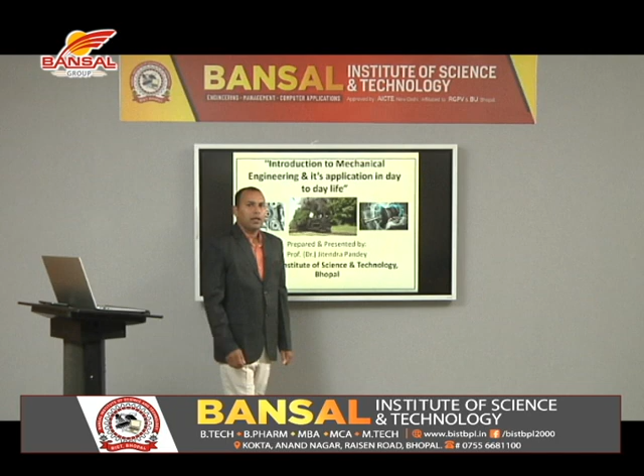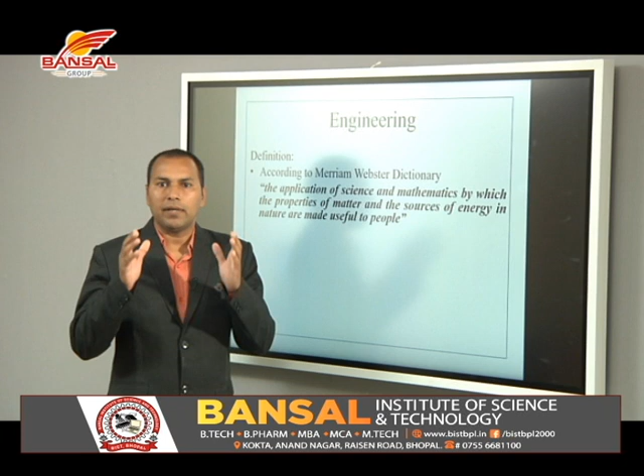Basically, engineering is the application of science and mathematics to design, develop and manufacture products for social utility for day to day use.

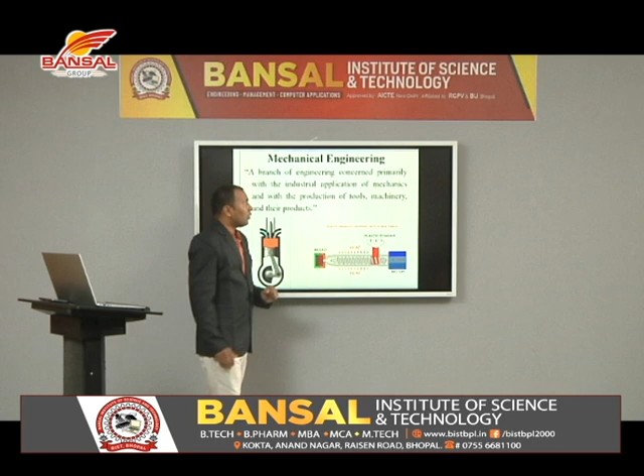Engineering is further divided into various branches like mechanical, civil, electrical, telecommunication and computer science engineering. Mechanical is one of the oldest branches of engineering. It deals with the analysis of force, mathematics and applied science to make and produce a product.

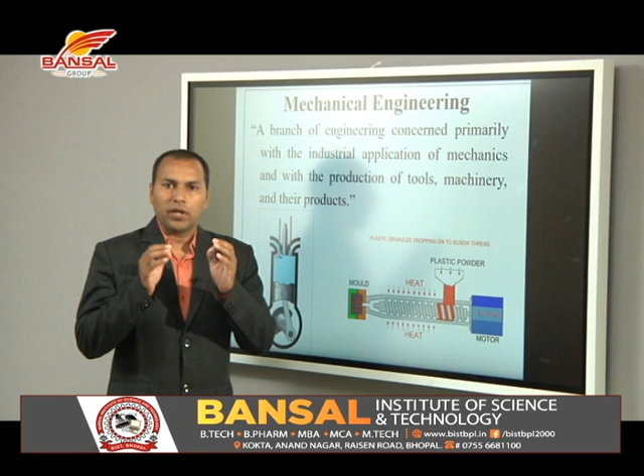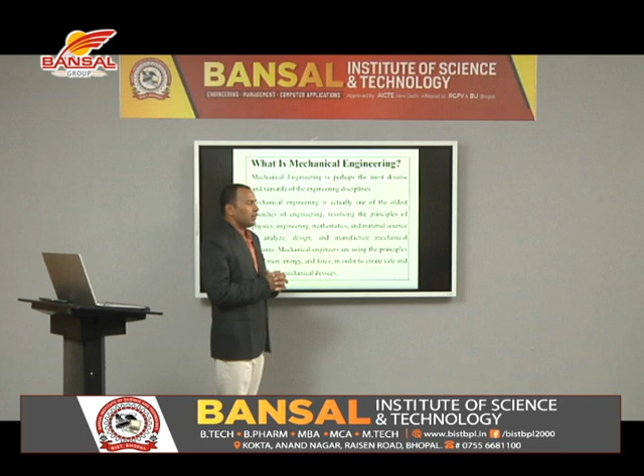Mechanical engineering is the mother of all branches. It governs day to day life and starts from early morning of life, from the cycle to the satellite.

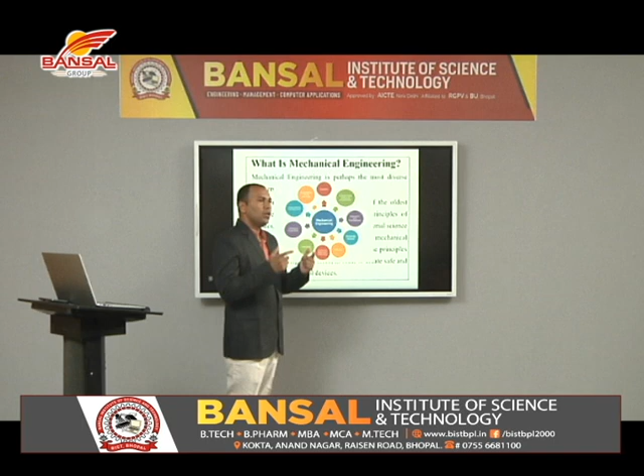Mechanical engineering consists of various subjects like physics, engineering chemistry, selection of material, strength of material, design of material, drawing of the product, and further its manufacturing, production and marketing, ending with recycling of the product.

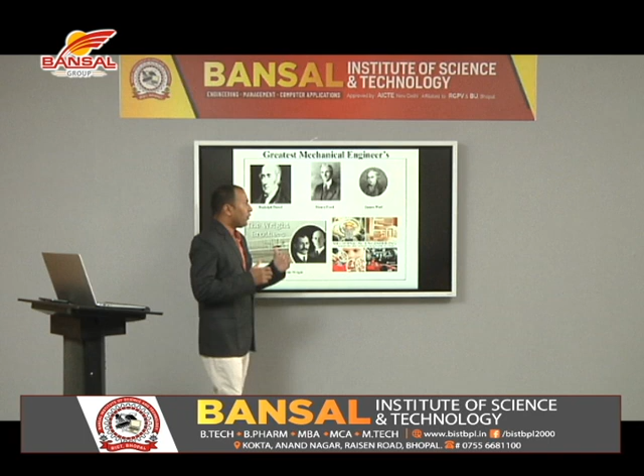These are a few of the great mechanical engineers in the world. We talk about James Watt, Carnot, Diesel, Henry Ford and many more. In our Indian continent, we see Dr. Visvesvaraya and Abdul Kalam.

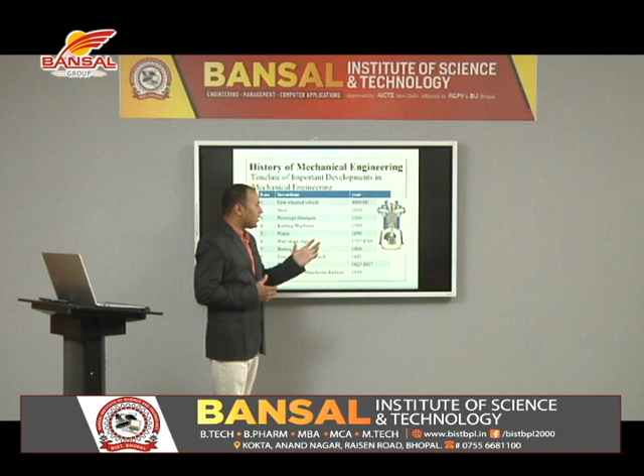There are mechanical products and machines discovered and invented for the utilization of society, like the wheel, steel products, knitting machine, and the cylinder-piston arrangement that is the foundation of the IC engine.

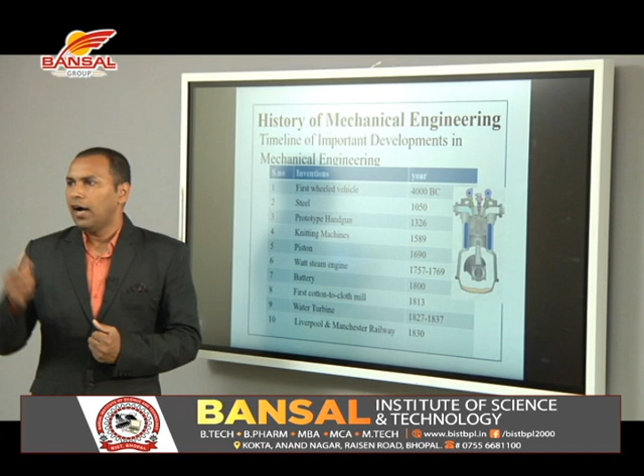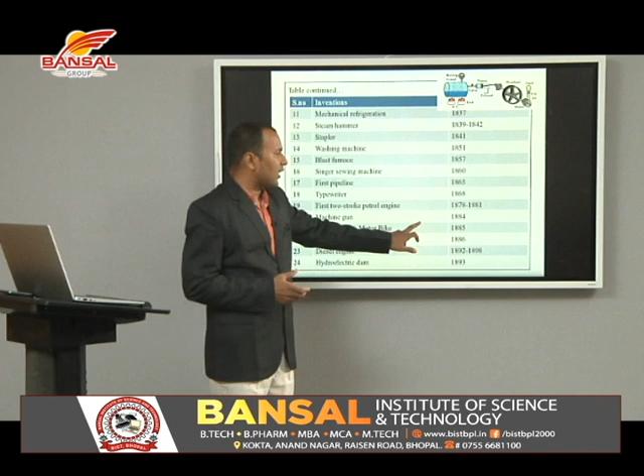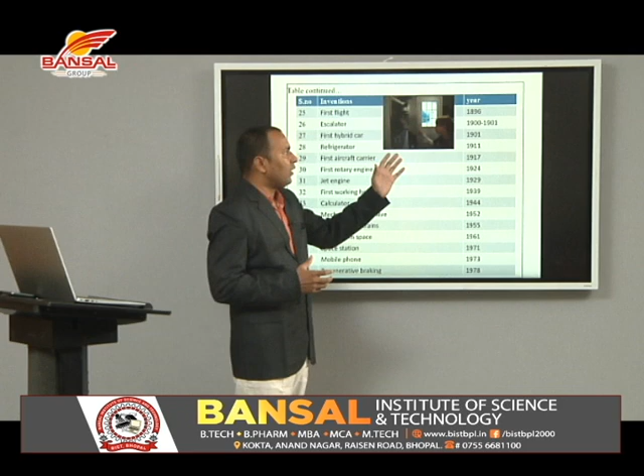There are machines like the steam engine, IC engine, and various vehicles we travel in day to day. You will have seen the refrigerator in your home - this was the first refrigerator, such kind of air conditioning machine that is a need of our society. These are a few live products of mechanical engineering, from cycle to satellite.

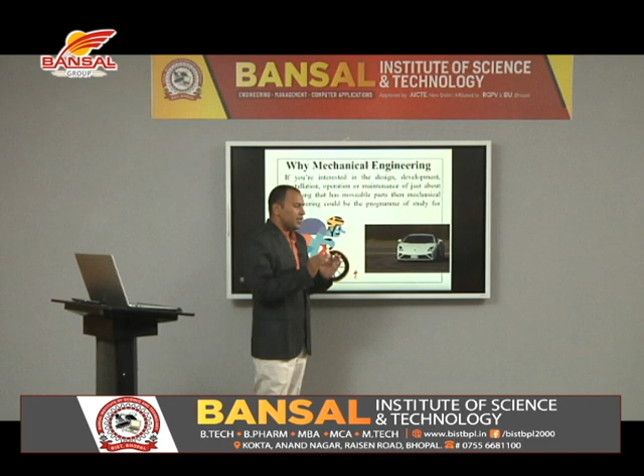Automobile engineering is one part of mechanical engineering. Mechanical engineering develops starting from the fulfillment of need, selection of material, design of the product, drawing of the product, and finally production of the machinery.

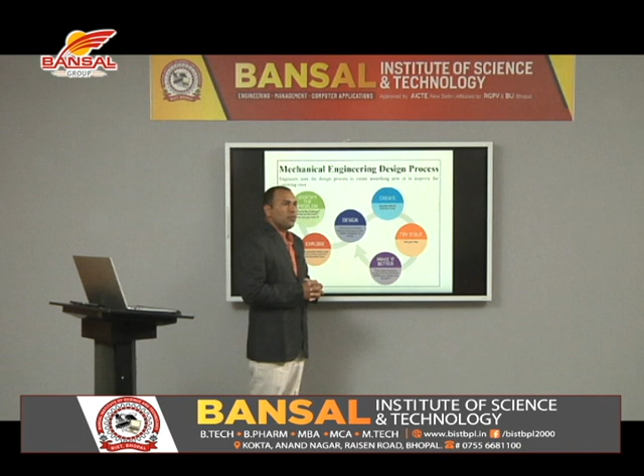In industry, whenever you go, you see how we find the need of society. After brainstorming, design, creation and trying it by hit and trial using various mechanical software, we develop the product first on computer and then do the manufacturing at real time.

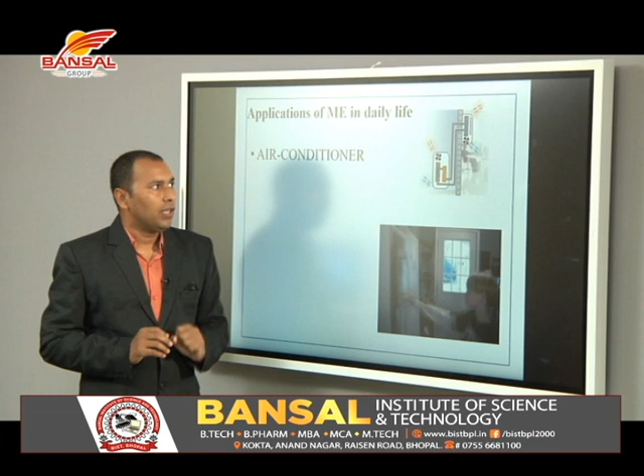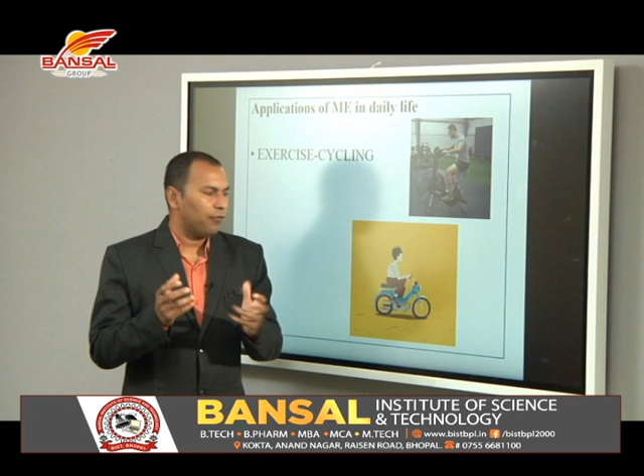When we see various kinds of mechanical products in day to day life, you will have seen the analog watch, hinges, air conditioning, refrigerator, and various kinds of cycles. That is the basic concept of mechanical engineering - how forces and mechanisms work together, how energy converts into work.

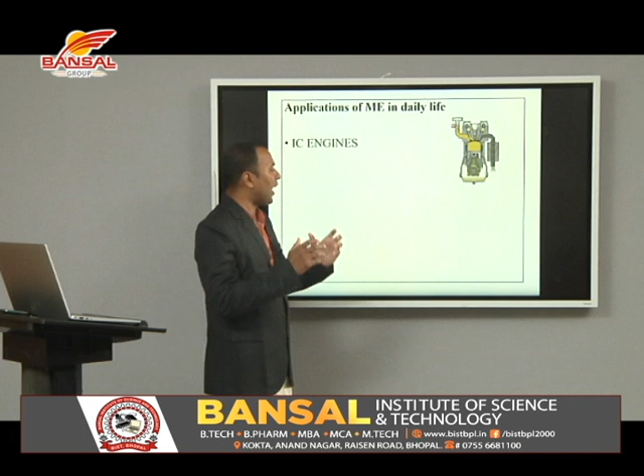You will further see the IC engine, that is part of our daily life. Without IC engine, without mechanism, we cannot live in a fast world.

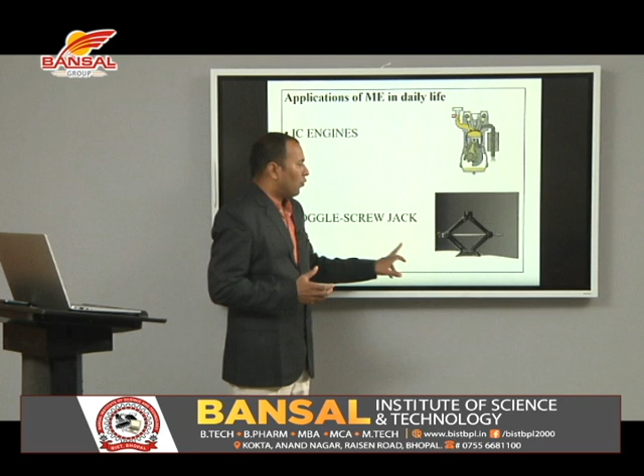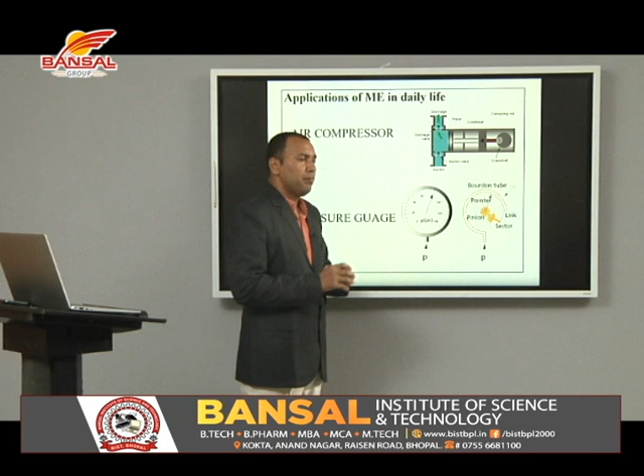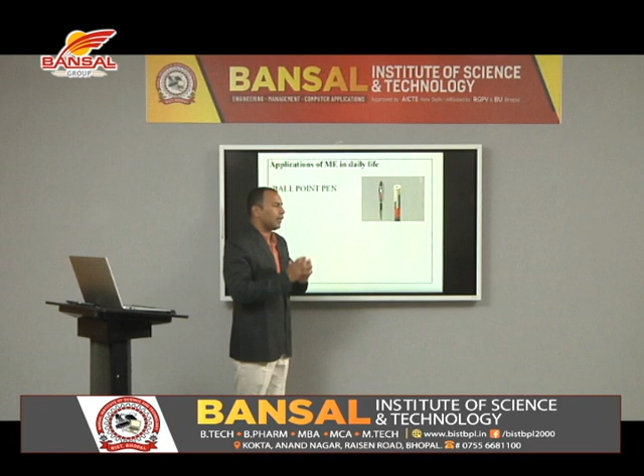If we talk about air compressor, pressure gauge, various kinds of mechanical machinery and measurement tools, that is part of our day-to-day life. Even if you are using a ballpoint pen, that is also part of mechanical - the ball, the spring, the manufacturing of the pen - that comes under production, which is the total scope of mechanical engineering.

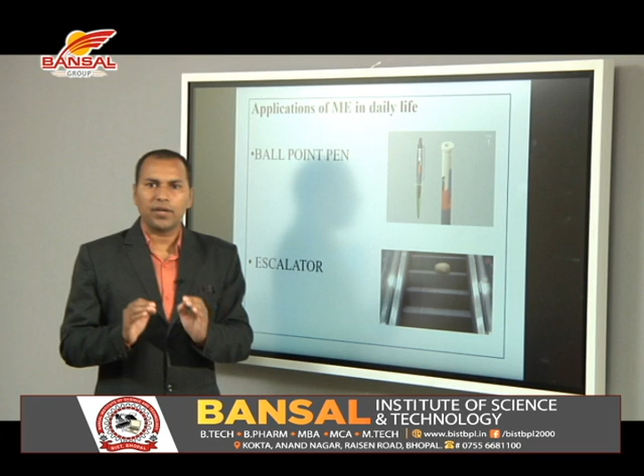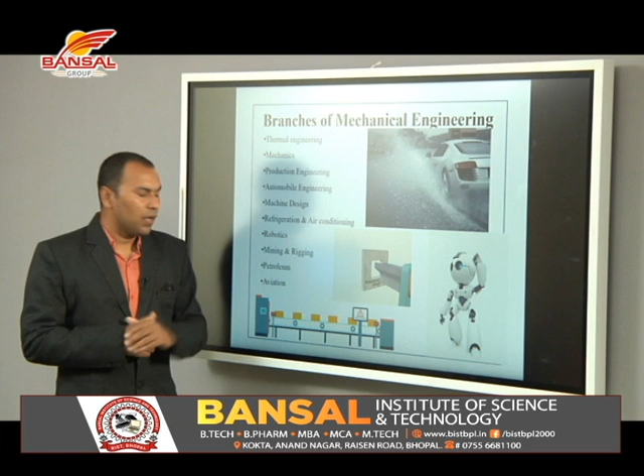There are further branches of mechanical engineering: mechanics, thermal engineering, robotics, petroleum, aviation and satellite, and the operation management system of industry.

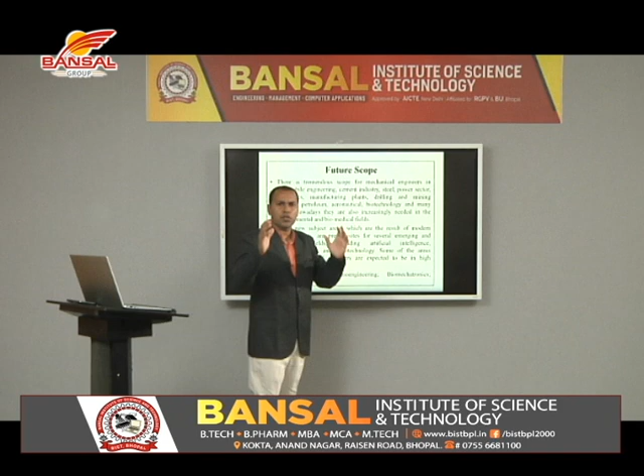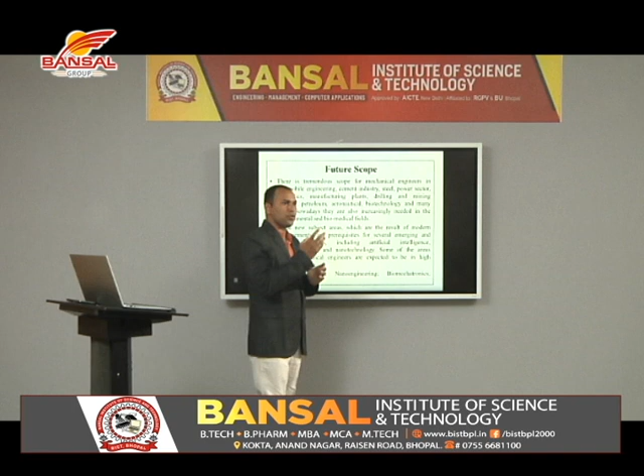When we talk about the future scope of mechanical engineering, there is tremendous scope. Mechanical engineering is not only enclosed in industry - it starts with brainstorming the need of society, design, development and production, along with marketing and thereafter recycling the product.